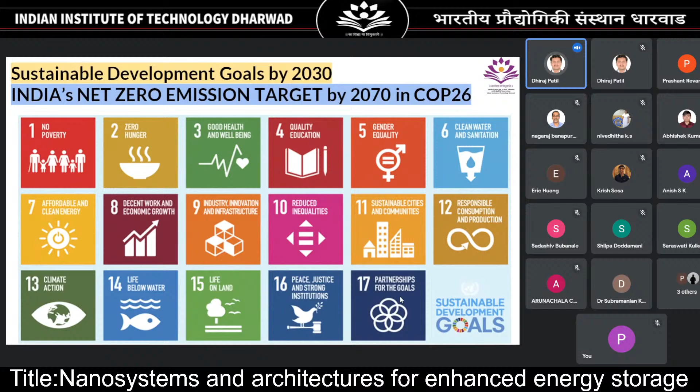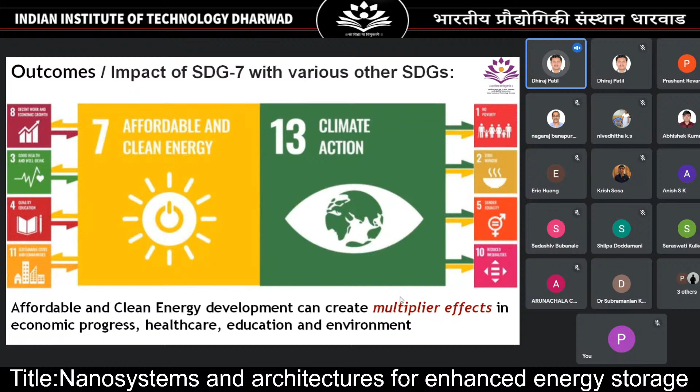Affordable and clean energy has a strong linkage with climate action, which is Sustainable Development Goal number 13, and you could see there are linkages to other goals too. Any development in the affordable and clean energy sector can create multiplier effects in economic progress, healthcare, education, and the environment. The center was inaugurated at IIT Dharwad on 20th January 2022 by former PSA Professor K. Vijayaraghavan.

The center is supported strongly by the Principal Scientific Advisor, Government of India, Selco Foundation, Honeywell, and Infineon. The center is committed to providing laboratory facilities and upskilling programs, which we are going to start from October. Also research and development activities, mainly in the power electronics domain, outreach and talk series—currently there are 3 in the talk series—hackathon and challenges, innovation, incubation support, as well as grassroots level implementation, field level experiences, and mentorship.

So these are the equipments that we currently have. Equipments at the center are categorized as test and measurement equipment, fabrication and prototyping lab, skill development lab, R&D lab in power electronics, as well as we are coming up with a model village. You are free to collaborate with us, come and use these facilities.

So these are the other facilities. There is a power hardware in the loop, which we call an HIL simulator platform with real-time controller prototyping. This is for power electronics and R&D equipment. You are also free to come and use this facility.

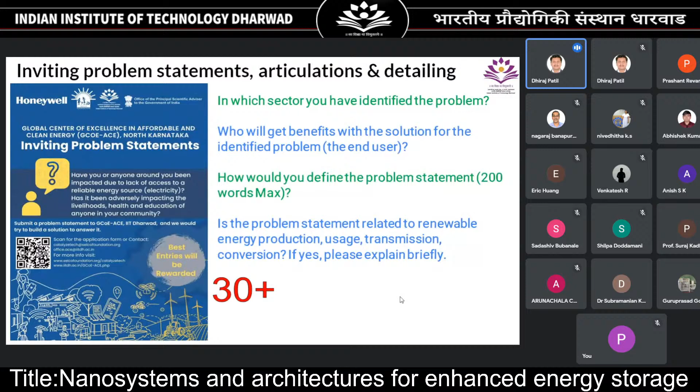The center has been inviting problem statements, articulation and detailing. Basically there is a Google form which asks different questions, and what is expected is a problem statement definition of 200 words. This is available on our website, the invitation, and you can participate anytime. Currently, there are 30 plus problem statements already captured through online and offline events.

There is another innovation challenge from the center currently ongoing. Today is the last date for the first call. We are going to release the second call from tomorrow. The second call for Catalyze Tech 2022, inviting innovators and entrepreneurs, will have a deadline of 20th October. This is to make social innovations in the sector of energy, clean energy, and we are open for innovative ideas and supporting those innovative ideas.

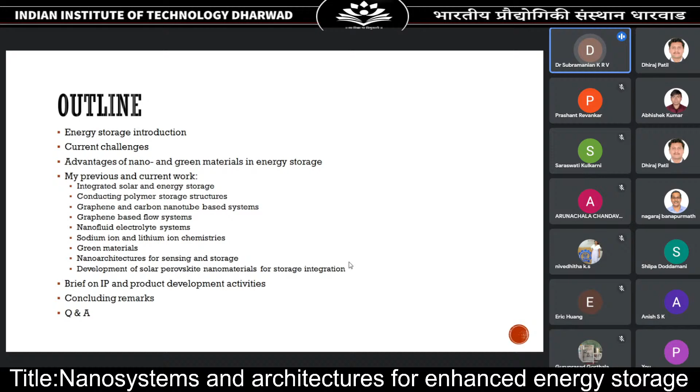This includes conducting polymer storage structures, graphene and carbon nanotube based systems, graphene based flow systems, nanofluid electrolyte systems, sodium ion and lithium ion chemistry, green materials, nano architectures for sensing and storage, and development of solar perovskite nanomaterials for storage integration. I will also give a brief on intellectual property and product development activities, and then finally conclude and take questions and answers.

Let us introduce the audience to a little bit of energy storage. Energy storage is a key aspect in the smooth functioning of numerous gadgets that aid easy maneuvering through modern life. One key component is supercapacitors that store energy periodically, and they have emerged as potential inventions for which mechanical flexibility is an absolute requirement for their future applications.

Energy storage devices which can deliver stored energy for later usage have been highly sought after for the uninterrupted functioning of various gadgets required for everyday work. There are various associated devices in this category, which include capacitors, batteries, fuel cells, etc.

The recent descendant of this family is supercapacitors, which are capable of delivering high power densities and reasonably good energy density, and they are creating new trends.

Recent works are focusing on the development of flexible supercapacitors. This has a combination of mechanical flexibility and high electrical output, making the devices suitable for applications in wearable electronics, wearable power supply devices, regenerative braking in motor vehicles, etc.

These devices store energy predominantly by reversible Faraday redox reactions at the interface of an electrolyte and electrode material. The electrode material is made up of the active material. There is also some contribution from the electric double layer formation, which may contribute to the overall energy storage mechanism, depending on the type of materials used and the structure of the device.

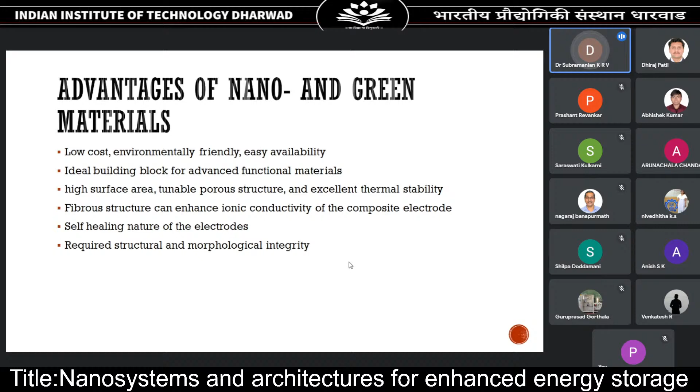Let us go to my work. I'll start with my previous work and then progressively go on to my current work.

One of the first concepts I studied more than 10 years ago is integrated solar energy storage. If you combine a solar cell with a capacitor, the output can be drawn only from the solar cell, only from the capacitor, or from both simultaneously.

The diagram below shows an integrated structure with an anodized titanium plate. You can see nanotubes on either side of the plate. On one half of the plate, the solar structure is built up.

What is built up is actually a dye-sensitized solar cell, where the dye is coated on the TiO2 nanotubes, followed by the redox electrolyte, and then the counter electrode, which is platinum-coated ITO. So the solar cell functions via the DSSC mechanism.

On the other side of the titanium plate, the titania nanotubes extend on both sides, with a thin layer of zirconium dioxide, a dielectric material. This side functions like a capacitor that can store charge. Because it shares a common interface, charges can flow seamlessly from the solar cell to the capacitor. This is integrated solar and energy storage realized through double anodization of the titanium plate.

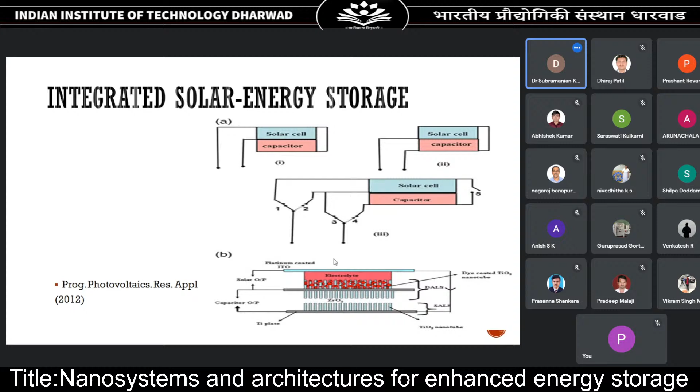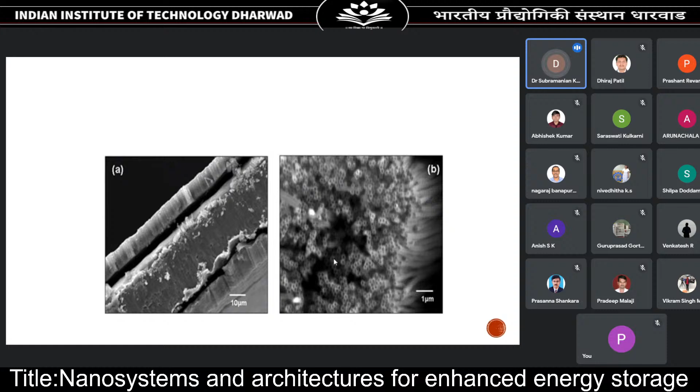This shows a low magnification SEM image. You can see the titanium plate in figure A, with nanotubes growing on either side, forming a forest of nanotubes. The same nanotubes are shown at higher magnification in figure B, where all the tubules are growing out of the surface. These are all titanium dioxide nanotubules.

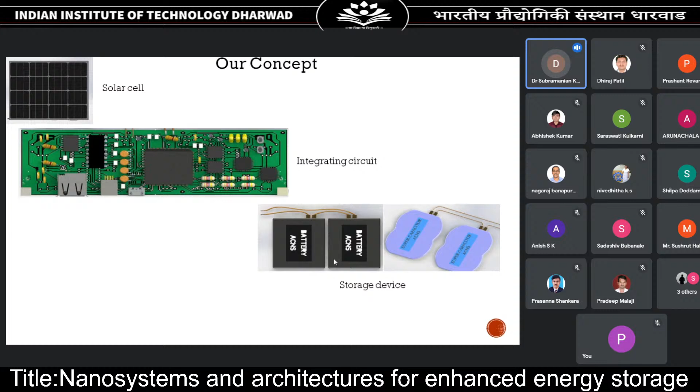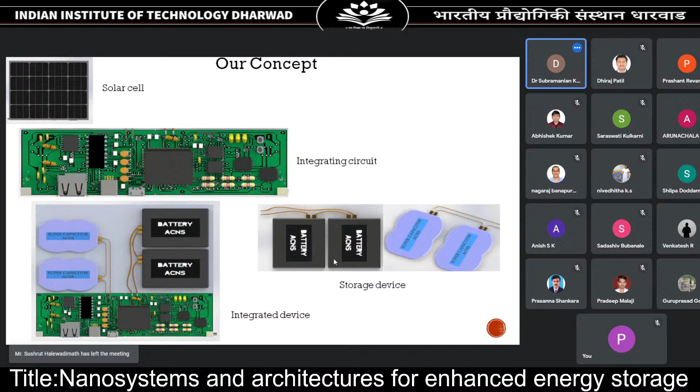So to do this, we had to do a lot of research. I had to investigate separately on the solar cell. Solar cell, as you know, has an anode, especially the dye-sensitized solar cell, it has anode and cathode.

So we looked at nanostructured titania with graphene, and we also looked at PEDOT:PSS, which is a conducting polymer, on the cathode side. And on the supercapacitor hybrid battery, we had to devise a different electrode.

So we looked at structures like manganese dioxide and nickel oxide nanostructures. We looked at lithium manganese oxide with carbon. We looked at lithium iron phosphate and lithium sulfur, which were new concepts.

And then the integrating electronics, which will combine the solar cell and the battery components. So that is what is shown in the bottom left hand side, where you can see a very compact panel. This has both the solar and the storage component on the same panel.

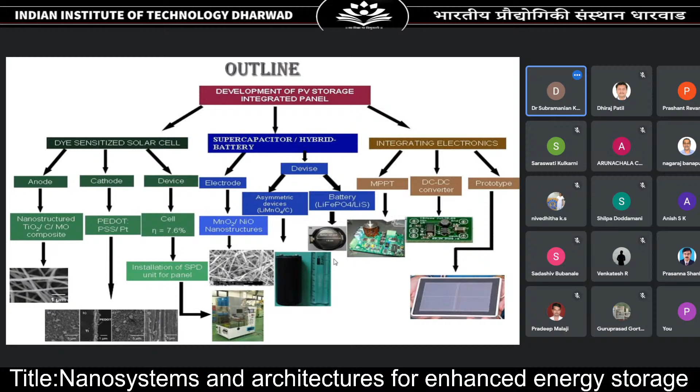So this is a brief on the dye-sensitized solar cell. We have the sensitizing dye, which is the ruthenium N719 dye or the N3 dye, and titania nanoparticles are nothing but the active layer, which will transport the charges. And we also have an electrolyte, which is the redox electrolyte, basically iodide and triiodide ionic liquid.

Coming to conducting polymer energy storage, the first work we undertook was on graphene polypyrrole. This was published in Chemical Communications.

So you can see all these images, SEM images, high magnification SEM images. Initially the conducting polymer was electropolymerized.

So what you do is you take polypyrrole, which is the conducting polymer, and then we electropolymerize onto a substrate using applied voltage. And on top of that, you can see the polymeric nanotubules in part F of the figure. On top of that, we have deposited the graphene by electrophoretic deposition.

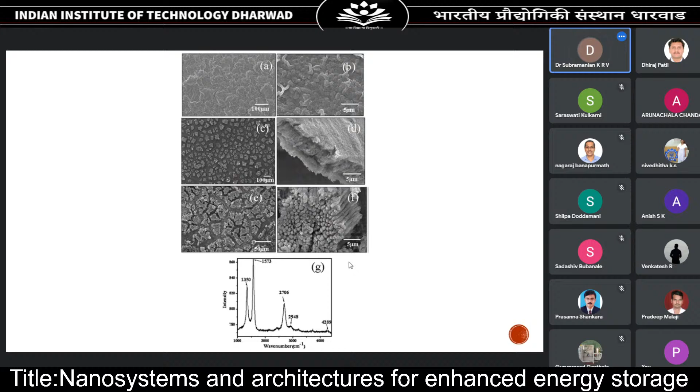So you can see C and E, that is the combined structure of the graphene and the polypyrrole. These are all very, very tiny structures. And the graphene we deposited had a distinct Raman signature as shown by the graph below.

So the kind of capacitance we got was 1510 farad per gram, area capacitance of 151 millifarad per centimeter square, and volume capacitance of 151 farad per centimeter cube at 10 millivolt per second scan rate.

Coming to graphene-based storage systems, one of the interesting systems we studied was graphene cobalt hydroxide. Cobalt hydroxide is a very unique nanomaterial in that it has got a layered structure.

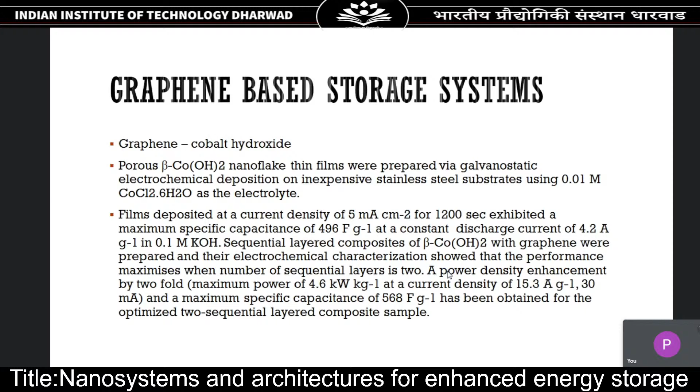And this was published in Energy Technology in 2013. This shows the cyclic behavior under cyclic voltammetry. You can see that even after 1000 cycles, it has very good fidelity.

We also carried out TEM of the composite structure as well as SAED. You can see that it has got a very flaky structure and a layered structure.

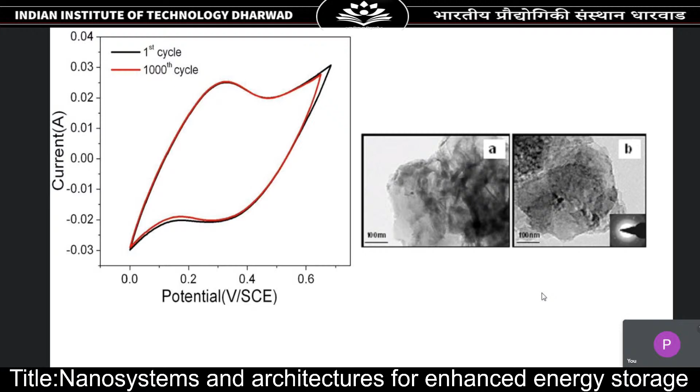So what I mean by 4 layers is you have cobalt hydroxide graphene, which is one layer. Then cobalt hydroxide graphene, second layer. Then cobalt hydroxide graphene, third layer, and cobalt hydroxide graphene, fourth layer. So this is how it works.

Let us go to the next system, which is exfoliated graphene-based storage, which was published in Renewable and Sustainable Energy.

What we have done is we have taken graphite and chemically exfoliated it. Not only chemically, it is a combination of chemical exfoliation and mechanical exfoliation. We have done ball milling, and we have also used a chemical exfoliating agent, which is 1-pyrene carboxylic acid. And we have done the liquid exfoliation in methanol and DMF.

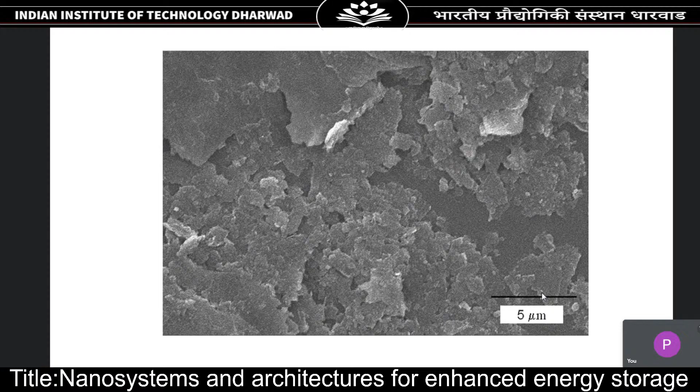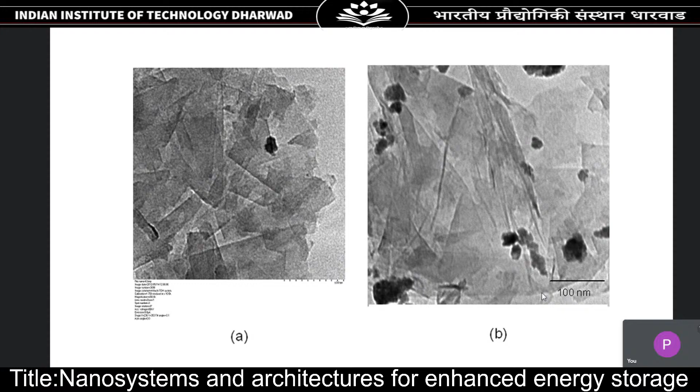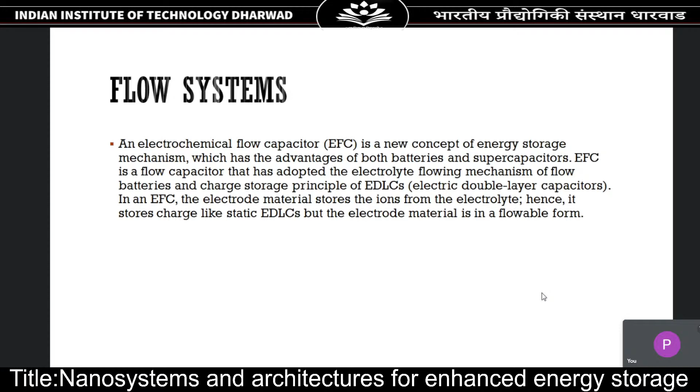So we have investigated electrochemical flow capacitor performance using graphene nanoplatelet based slurry, and we have also used the control material, which is graphite-based slurry. The kind of performance we got was, if you take a graphene-based slurry in an intermittent flow capacitor, we got a capacitance of 64.5 farad and energy density of 14.3 watt hour per liter. And if you use it in a full flow device, then you get a capacitance of 1.08 farad. We also saw that if you use ionic electrolyte, then we get energy density of 6 watt hour per kg, and this is much better than the graphite based slurry, which only gives about 2.2 watt hour per kg.

So this is the structure which was made to construct the electrochemical flow device. You can see that the flow cell is very simple. It has got the current collector and the electrode, and there is a separator in between. Then it is housed in the center of the device, and it is connected to 4 peristaltic pumps, which drive the slurry from the container. For example, the flow of electrolyte into the cell and out of the cell is determined by the peristaltic pump.

This device was made in the laboratory, and it was also published in the Journal of Materials Chemistry. This is the chronoamperometry data what we got.

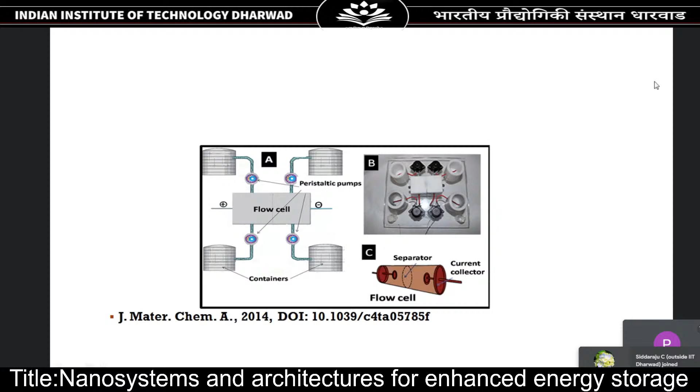And this is a cycling study, so we had carried out up to 130 cycles. You can see that there is very good fidelity of the behavior. There is not much fade of the charging or the discharging.

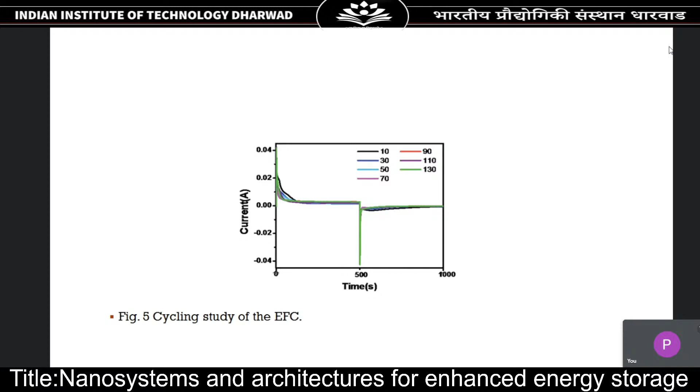Next, going on to the nanofluid electrolyte system. One of the devices we are currently studying is a sodium ion supercapacitor. Normally what is used in the sodium ion supercapacitor is sodium perchlorate, which is the normal electrolyte, in propylene carbonate. So we modified that electrolyte with nanofluids of copper oxide and iron oxide in ethanol. And of course, the electrodes of the sodium ion devices are themselves made up of nanomaterials like carbon nanotubes, sulfur, cellulose, activated carbon, etc.

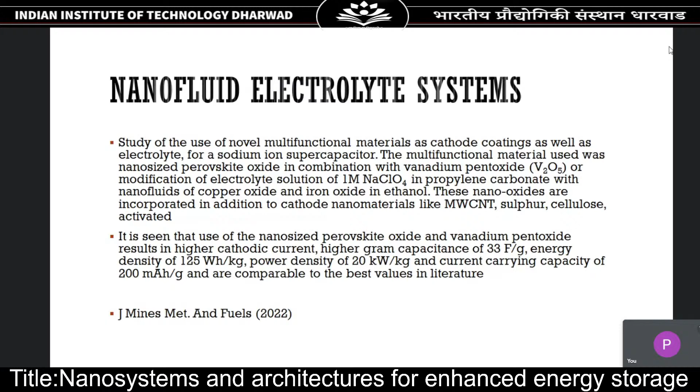So we were able to get very good values from using nanofluids. We got an energy density of 125 watt hour per kg, power density of 20 kilowatt per kg, and a current carrying capacity of 200 milliampere hours per gram. These are comparable to some of the best values in literature.

So these are some of the SEM pictures of the electrodes, which consist of multi-wall carbon nanotubes. They consist of sulfur, and they also consist of the perovskite material. So you can see it's a composite material which is forming the electrode of the sodium battery.

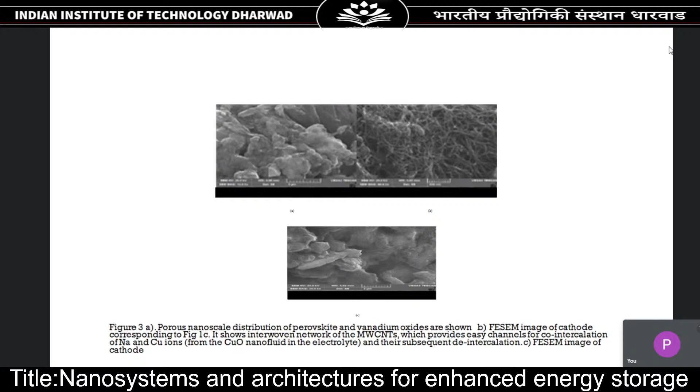And the very good thing about nanotubes is—I'll come to this in the subsequent slides. So what was the reason for using multi-wall carbon nanotubes? This was published recently in Materials Letters.

Multi-wall carbon nanotubes have a very open tubular structure, and it is very highly suited for sodium intercalation. The theoretical inner diameter of MWCNT is about 5 to 10 nanometers, and the sodium ion is only about 0.1 nanometers, so you can see that it can very easily intercalate and deintercalate.

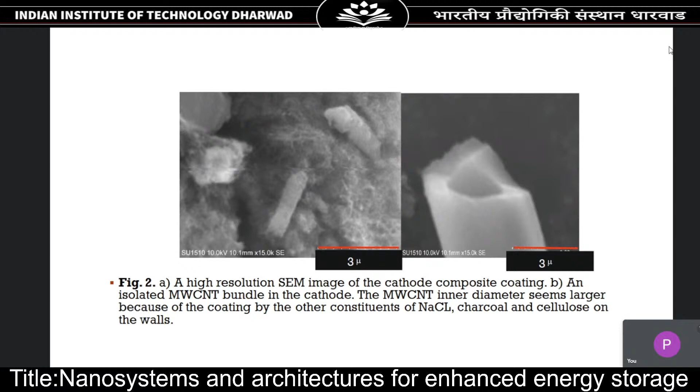Coming to the lithium ion chemistry, one of the devices we studied earlier was the lithium sulfur battery. The lithium sulfur battery was very attractive because it has very high theoretical capacity and energy density. The capacity can be as high as 1640 milliampere hours per gram, and energy density can be as high as 2400 watt hours per kg. The fabrication cost is quite low because sulfur is used, toxicity is low, and it has a good safety profile and cycle life.

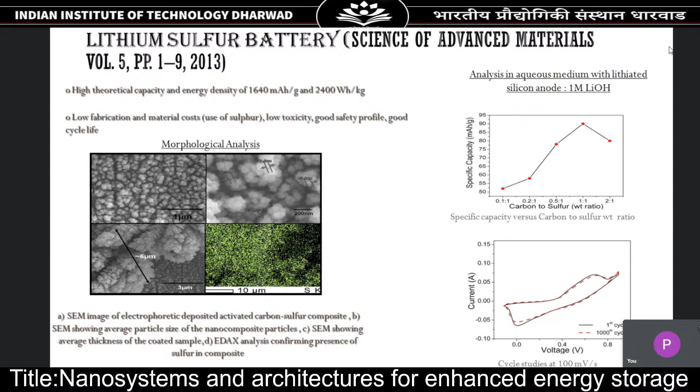Coming to another lithium ion chemistry, we studied lithium manganese oxide with graphene. This was a composite—lithium manganese oxide and graphene was used as the working electrode, the electrolyte was lithium perchlorate, and graphene was the counter electrode. This was published in Energy Technology.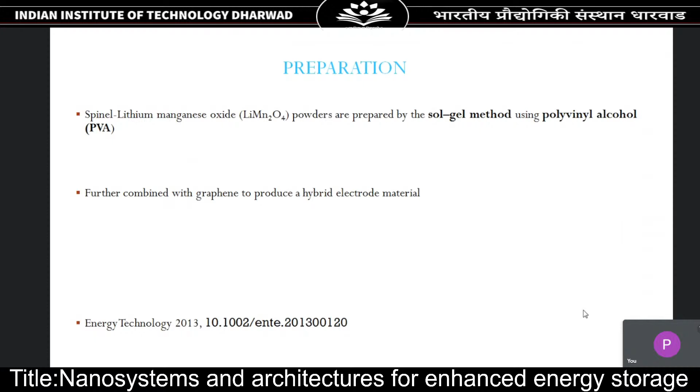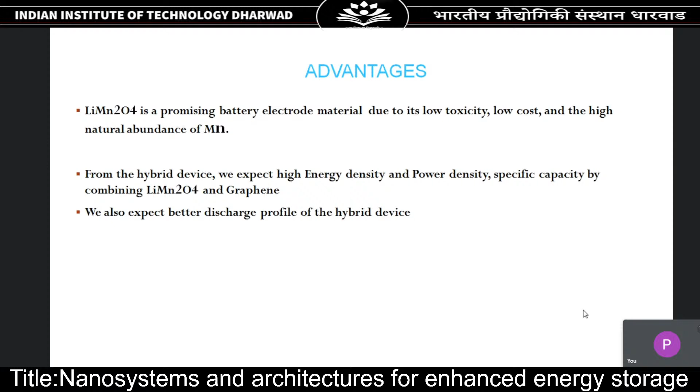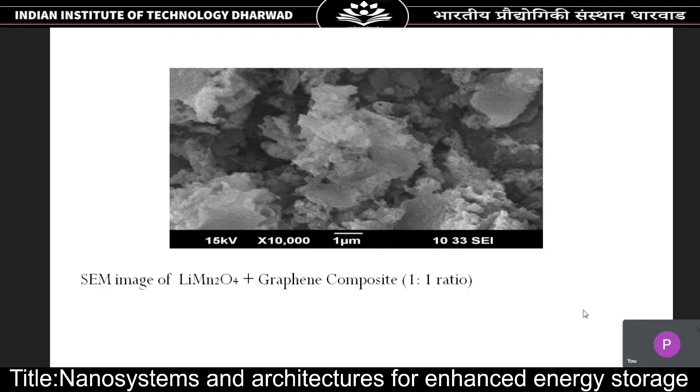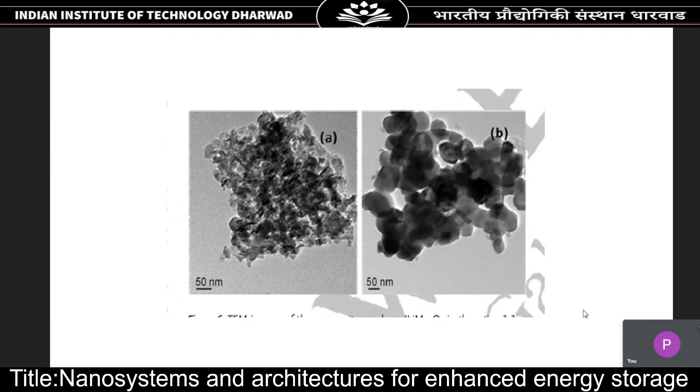Coming to green energy storage materials, what is meant by green? Green means something environmentally very friendly. One of the recent works carried out was the construction of flexible and binder-free supercapacitive electrodes using nanocellulose, extracted from areca nut husks, combined with polyaniline and silver nanoparticles. We got a specific capacitance of 780 farad per gram, an energy density of 15.6 watt hour per kg, and power density of 244 watt per kg.

The cycle life is also very good, retaining up to 98% of its specific capacitance. This was published in RSC Advances.

This was the method for getting the nanocellulose from the areca nut. You take the areca nut, peel it, and then do repeated acid and alkali treatment with HCl and NaOH, to shred the hemicellulose and reduce the size. Then you carry out bleaching and homogenization.

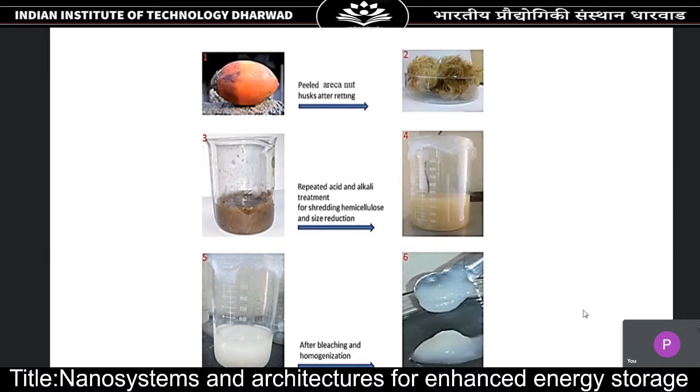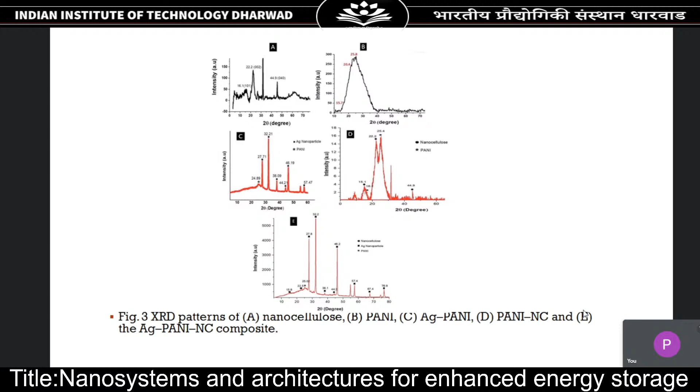We carried out XRD of the different subconstituents: nanocellulose, polyaniline, silver polyaniline, polyaniline and nanocellulose, and finally the composite. You can see the cyclic voltammetry and the charge discharge curves of the composite.

This composite has silver, polyaniline, and nanocellulose. The study was done at different scan rates and also for different current densities.

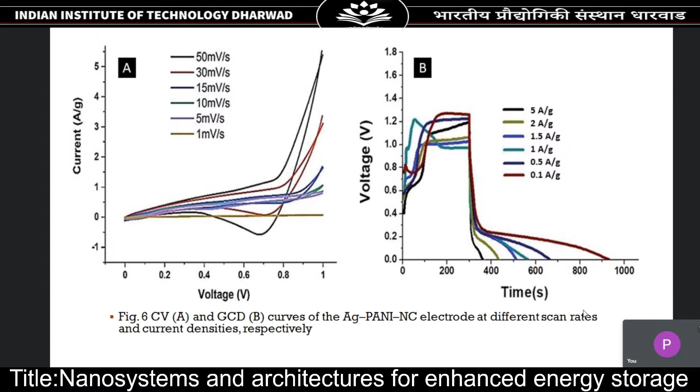An interesting thing was this was coated on copper foil, which as we know is very flexible. The idea was to make a flexible device, bend it through various degrees - 90 degrees, 180 degrees - and then allow some time for the device to recover, and then perform cyclic voltammetry as well as charge discharge.

I would also like to talk a bit about some nano architectures for sensing. This is in a way related to energy, not exactly supercapacitors, but I thought I could talk a little about this. We made a sensing device which has carbon nanotubes and nanofluids, and this was a flow device.

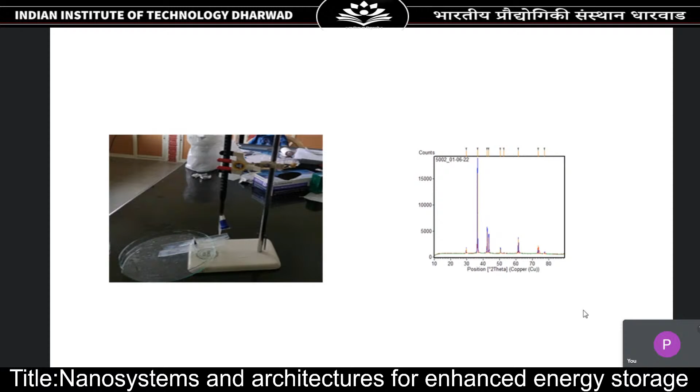This is the device being used when the nanofluid is rising into the sensor. You can see that the nanofluid is placed on the trough, and there is a channel-like device where the sensor is placed, and the fluid rises into the sensor using the Langmuir Blodgett effect or the capillary effect.

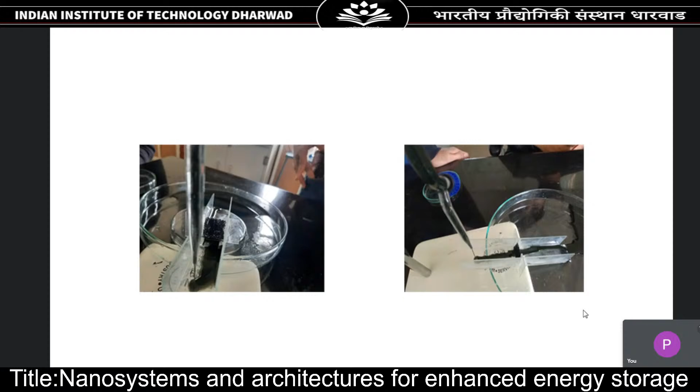We also used some nano architectures for storage. One of the things we thought was, instead of indium tin oxide for the touch screen, we can use graphene. So we have very different parameters of the graphene, such as taking glass, doing some pre-cleaning, and varying the weight of graphene in the graphene ethanol suspension. We have used adhesion promoters such as polymethyl methacrylate, and found optimum parameters, which are longer cleaning times, lower graphene weight, and the use of PMMA.

We have studied different characteristics such as optical transparency, adhesion, electrical resistivity, and some modeling was also done. This was also recently published.

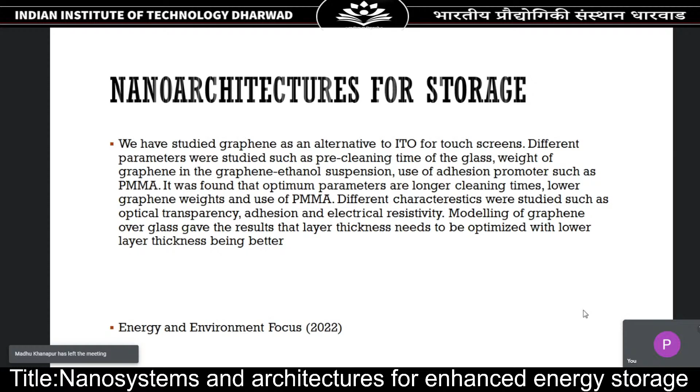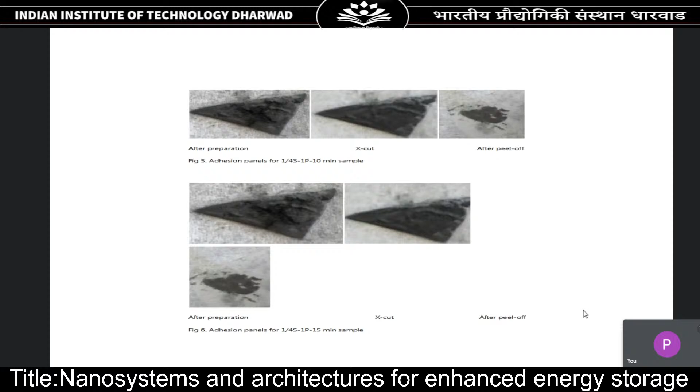We have done some adhesion tests which are based on ASTM, called the X-cut method. We have taken the sample after preparation, done an X-cut test, then done a peel off. This is done for two types of samples. You can see that some of the samples retain a significant amount of the coating even after peel off, showing very good adhesion of the coating to the glass.

I also worked on solar nano perovskite materials for storage integration. One of the compounds we chose was cesium sodium bismuth, used in perovskite solar cells as a photoactive layer. We have been able to synthesize the perovskite compound with high purity, more than 98%. Purity is very important in the perovskite because if the current generated from the solar cell has impurities, they will contribute to the recombination process, reducing the electron and hole density, and the cell will not perform as well.

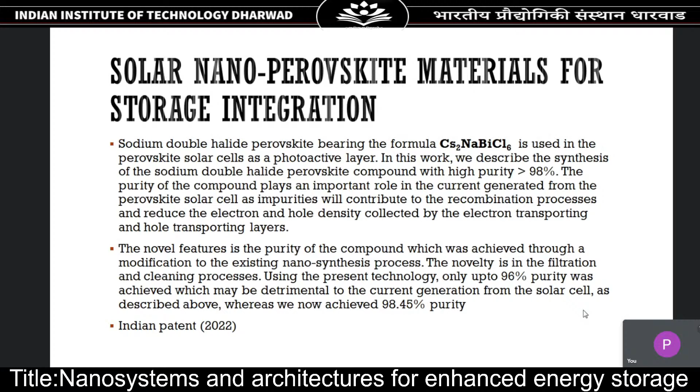We have changed some of the filtration and cleaning processes and improved the purity to 98.45%. Solar cells were made and IV curves characterized. This is an Indian patent filed very recently. This is the XRD graph of the 98.4% pure perovskite. Once the patent is granted, we'll be publishing it.

So this is a brief about my past and current research work, which has touched upon many systems. As I told you, I worked on integrated storage, conducting polymer storage, graphene storage, sodium-ion batteries, lithium-ion batteries, sensors, carbon nanotube sensors, and carbon nanotube graphene storage. That gives you a glimpse of the different aspects I have studied over the last 14 years.

Coming to IP and product development, many of these works are protected by patents, and I have also done some product development in the areas of integrated storage, flow sensors, sodium batteries, and solar nanomaterials. Most of our patents are flowing into our Ramaiah Evolute incubation cell, which embraces these patents and works toward startups and innovation incubation.

So what are the challenges in IP creation? From my experience, I can put down a few points which may be useful when you, as researchers, go for IP generation and creation. One should have an absolutely innovative idea, which is backed with initial data.

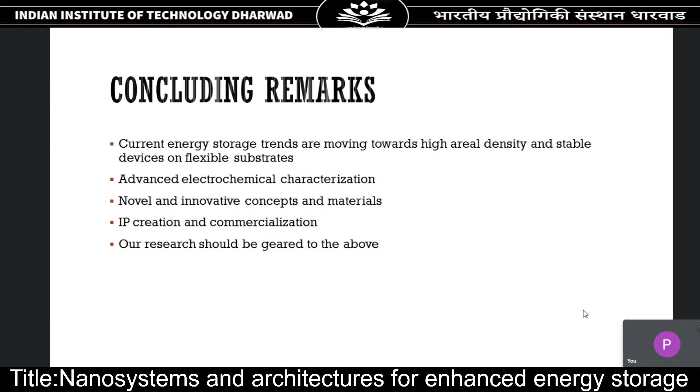No, on time. Thank you, sir. Yeah, so I think that is the end of my talk.